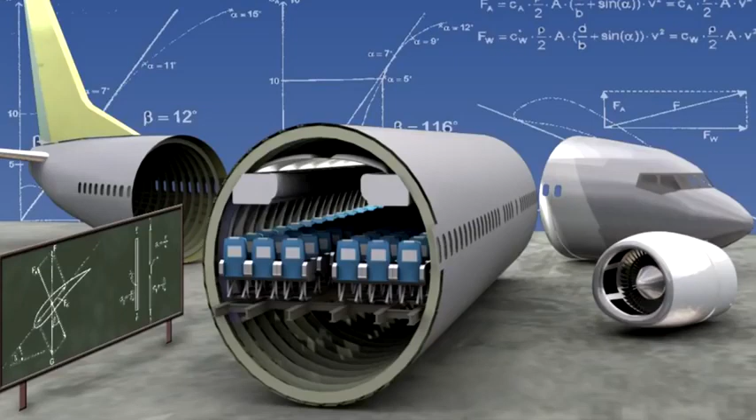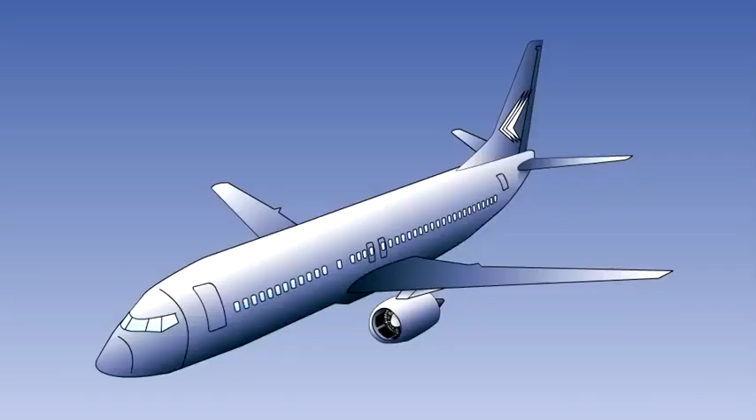There are three main types of fuselage construction in use. First, there is the truss or framework type, which is generally used for light, non-pressurized aircraft. Then there is monocoque, which is only rarely used. And finally, semi-monocoque, which is in use on most other types of aircraft. The last two types of structure are more generally referred to as stressed skin.

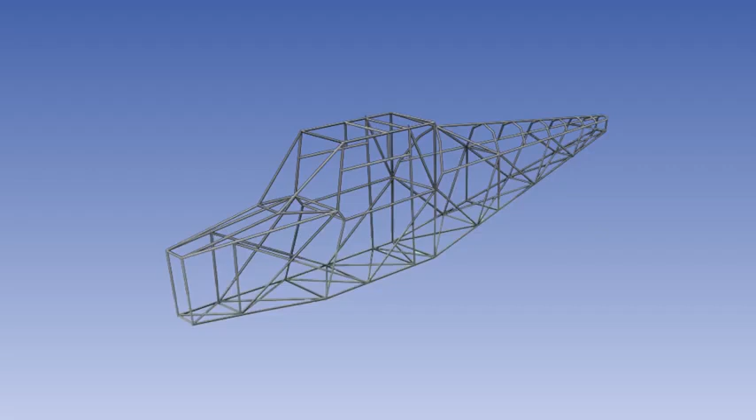The framework or truss consists of light gauge steel tubes welded together to form a space frame of triangular shape to give the most rigid of geometric forms. Each tube carries a specific load, the magnitude of which depends on whether the aircraft is airborne or on the ground. It is a strong, easily constructed, and relatively trouble-free basic structure. The framework is covered by a lightweight aluminium alloy or fabric skin to give an enclosed, aerodynamically efficient load-carrying compartment.

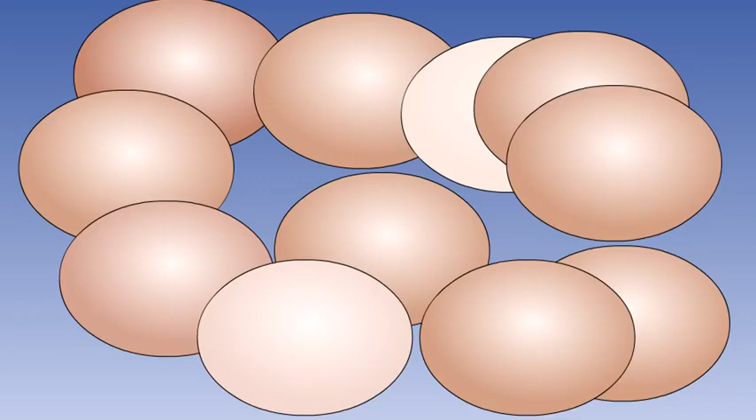Monocoque is a French word meaning a single shell. In a monocoque structure, all the loads are taken by the stressed skin, with just light internal frames or formers to give the required shape.

Sandwich construction, which is a honeycomb core with a skin of aluminium alloy or composite material such as glass reinforced plastic or carbon fiber reinforced plastic, can be used to provide rigidity and strength. However, even slight damage to the skin can seriously weaken the structure.

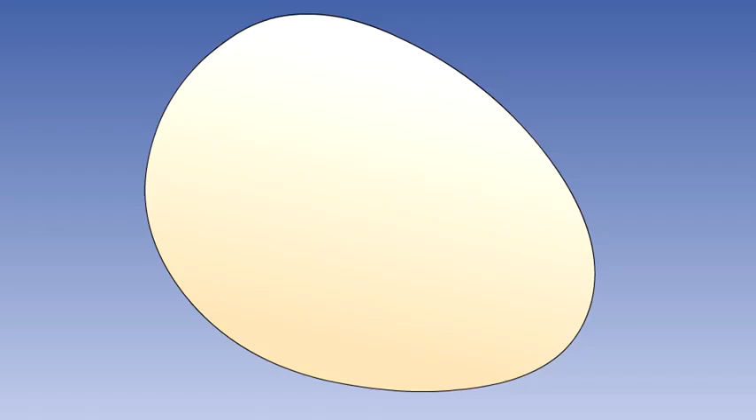To be a true monocoque, the structure would have no apertures in it at all. But for practical purposes, they have to be provided for access and maintenance. The apertures need to be reinforced so that the integrity of the structure is maintained. Once the aircraft doors are closed and all the hatches and access panels are fitted, the fuselage is, to all intents and purposes, a monocoque structure.

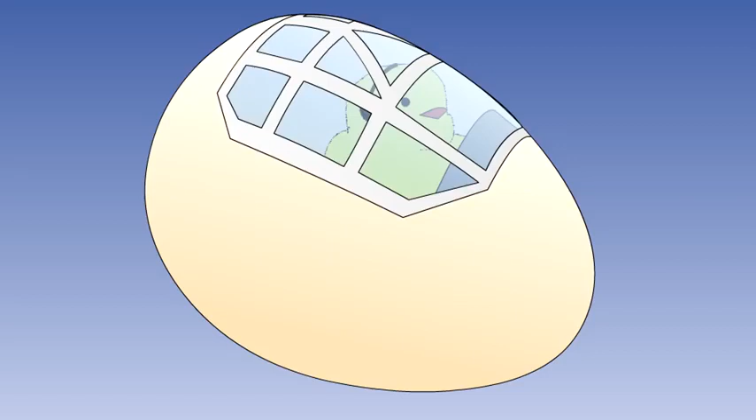One of the few examples of monocoque fuselage constructions is the Beech Starship.

As aircraft became larger and the air loads greater, the pure monocoque structure was found not to be strong enough. Additional structural members, known as stringers or stiffeners, and longerons are added to run lengthwise along the fuselage, joining the frames together. The light alloy skin is then attached to the frames and stringers by riveting or adhesive bonding.

Stringers stiffen the skin and assist the sheet materials to carry loads along their length. On pressurized aircraft, they take some of the strain caused by the pressurization and convert it into tensile stress. Longerons are more substantial than stringers and are fitted where extra strength is needed, such as for the seat rails in passenger aircraft.

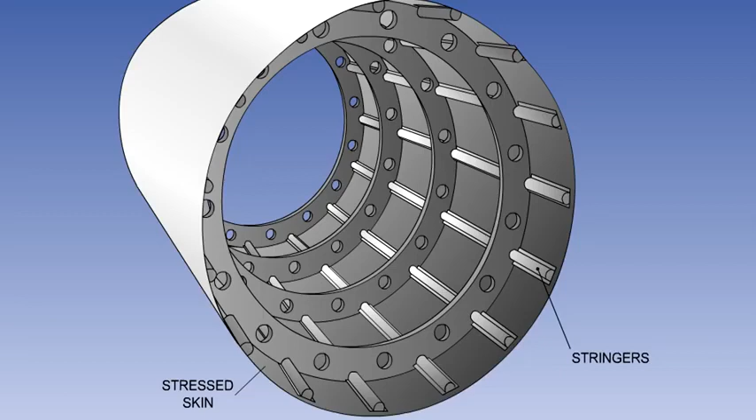When cutouts are made to stress skin structures, for example to provide access panels, doors or windows, or when repairs are required to damaged areas, reinforcement in the form of doublers or backing plates is required around the cutout. If the skin is machined from solid metal, then that part around the cutouts is left thicker than the rest to provide the required reinforcement.

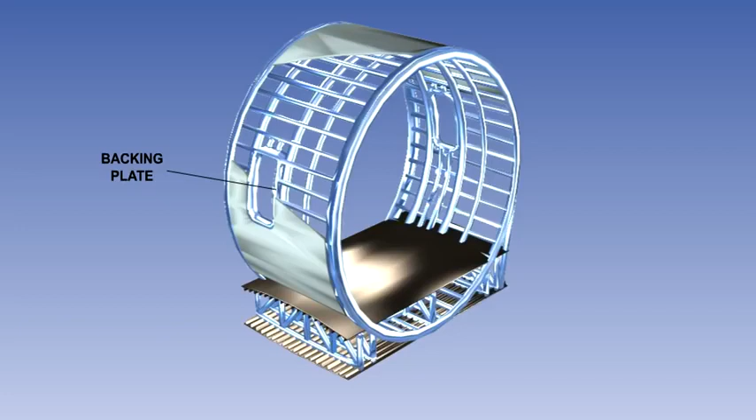The flight deck windows fitted to pressurized aircraft must withstand both the loads of pressurization and, because birds also use the sky and are not under air traffic control, they must bear the impact loads from possible bird strikes.

To do this, they are constructed from toughened glass panels, attached to each side of a clear vinyl interlayer. Windscreens are surrounded with a rubber seal and attached to the frame by bolts passing through the extended edge of the vinyl interlayer.

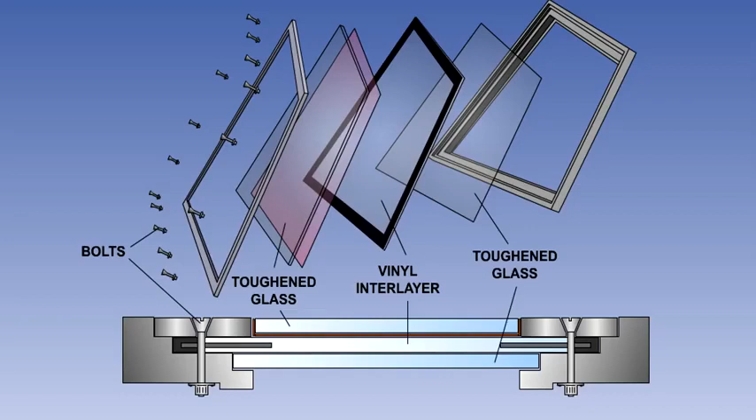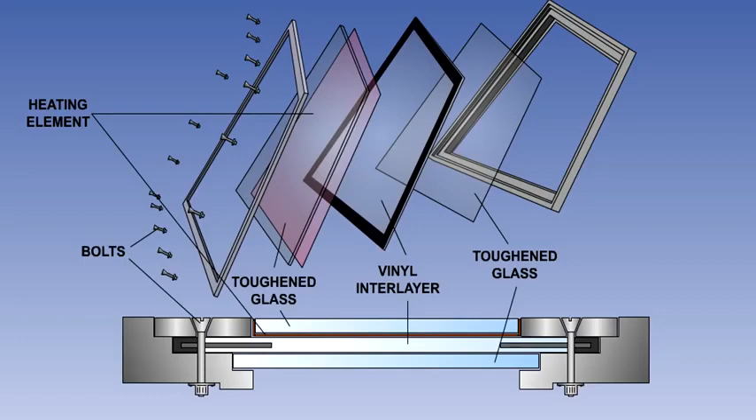An electrically conductive coating applied to the inside of the outer glass panel is used to heat the window. This prevents ice from forming and maintains the window's flexibility, making it more able to withstand bird strikes. The shock loading of a bird strike impact is absorbed by the ability of the vinyl interlayer to stretch and deform should the impact be sufficient to shatter the outer glass.

The aircraft must be capable of continued safe flight and landing after impact with a 4-pound or 1.8-kilogram bird when the velocity of the aircraft is equal to its design cruise speed, VC, at sea level, or 0.85 VC at 8,000 feet, whichever is the most critical. In other words, the windscreen must be able to withstand this impact without penetration.

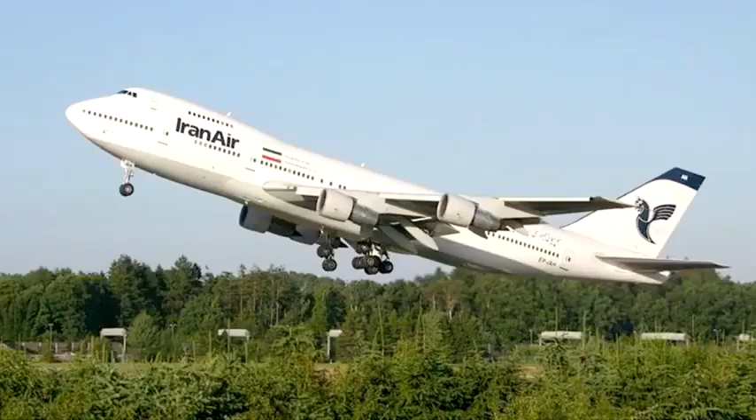The vertical and horizontal angles of the windscreen are specified so that each pilot has a sufficiently extensive, clear and undistorted view to be able to safely perform any maneuvers within the operating range of the aircraft.

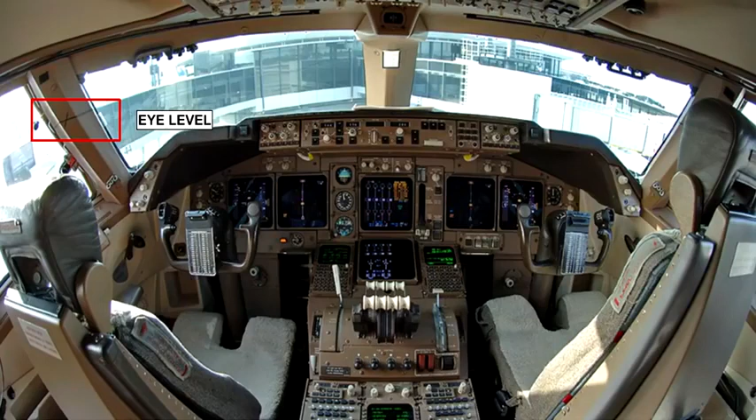It is important that the pilot has his seat in the correct position to get a good view forwards and downwards out over the window, over the coaming and nose of the aircraft, without restricting his overall view. To help with this, reference eye points are often painted on the flight deck windscreen frame.

On some aircraft, an opening window to the side of the windscreen, known as a direct vision or DV window, is provided to enable the pilot to have sufficient visibility to land the aircraft safely should the windscreen become obscured. These windows are also sometimes used as emergency exits.

Passenger cabin windows are designed to be fail-safe and normally have two panes of acrylic plastic mounted in an airtight rubber seal fitted into a metal window frame. The inner and outer panes are each individually capable of taking the full cabin pressurization load, so if one pane fails, the other will prevent loss of cabin pressure.

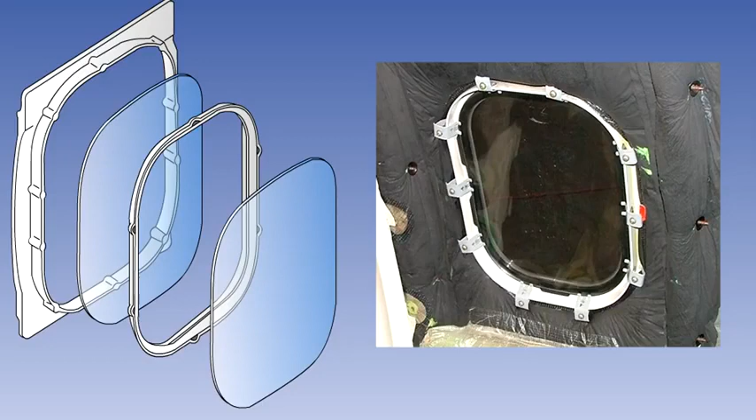The wings support the weight of the aircraft in the air, and so must have sufficient strength and stiffness to be able to do this. Their strength and stiffness is determined by the thickness of the wing, with the thickness and type of construction used being dependent on the speed and weight requirements of the aircraft.

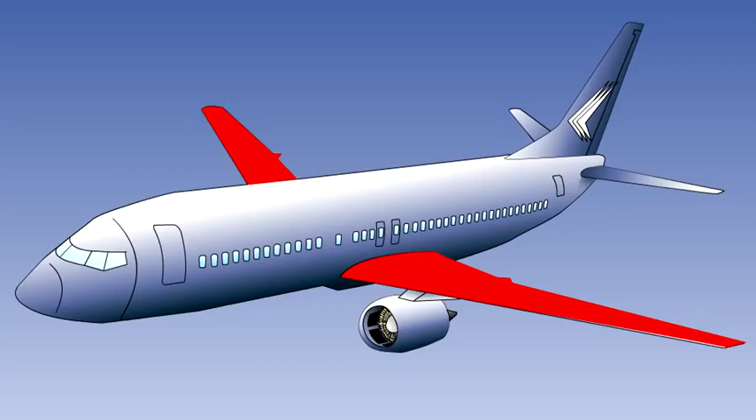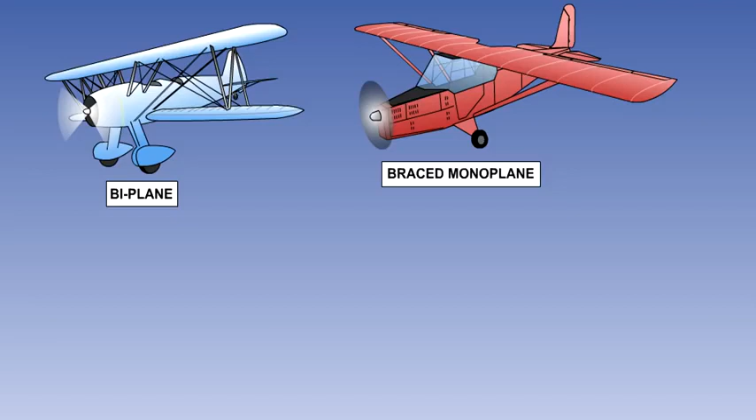The types of construction are biplane, braced monoplane, and cantilever monoplane.

Very few biplanes fly at more than 200 knots in level flight, so the air loads are low, which means that a truss-type design, covered in fabric, is satisfactory. The wing spars, interplane struts, and bracing wires form a lattice girder of great rigidity, which is highly resistant to bending and twisting. Unfortunately, this system also generates a relatively large amount of drag, which accounts for the fact that biplanes fly relatively slowly.

In flight, the flying wires hold the wingtips down and support the fuselage. On the ground, tension in the landing wires supports the wings.

In the braced monoplane type of design, the wing is connected by a brace to the fuselage or landing gear. In flight, the brace is subject to tensile loads and acts as a tie. On the ground, it is under compression and acts as a strut. To provide fail-safe protection, the brace is often made from more than one member. The Shorts Skyvan, for instance, has three members per brace. This type of design is mainly used on low-speed aircraft.

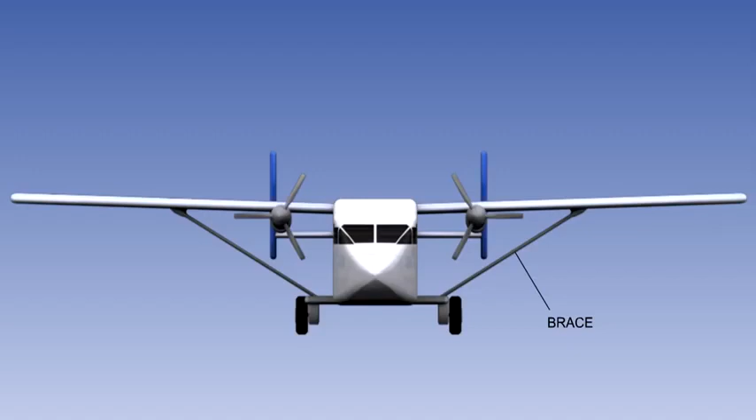Now we will look at cantilever wings, the design used by most modern airliners. The wings have to absorb the stresses due to the lift and drag in flight, and, if of this design, their weight when on the ground.

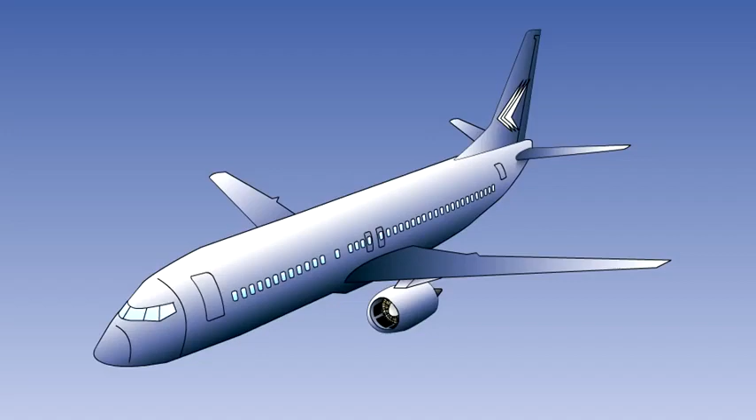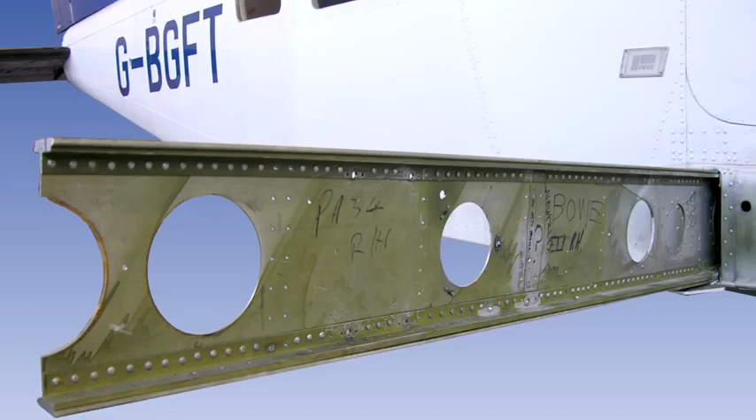This is achieved by building the wing around one or more main load-bearing members known as spars. The wing spars pass from wingtip to wingtip either as single structures or as connected sections. The spar will normally be an I-beam, either manufactured as a single part or made up of two or more parts to give it fail-safe characteristics.

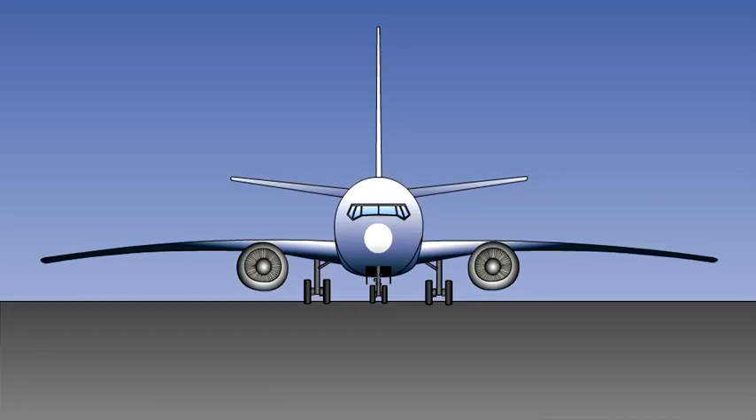These are constructed so that they will absorb the downward bending stresses when on the ground, and the upwards, rearwards and twisting stresses when in flight.

In flight, bending stress relief is provided by mounting engines on the wing and by locating the major fuel tanks in the wing. Fuel usage procedures are designed so that the wing tank fuel is used last. This is of particular importance at high all-up weights, when the outer wing fuel tanks should be full. As fuel is used, the weight of the aircraft decreases, which reduces lift required and therefore the wing bending moment.

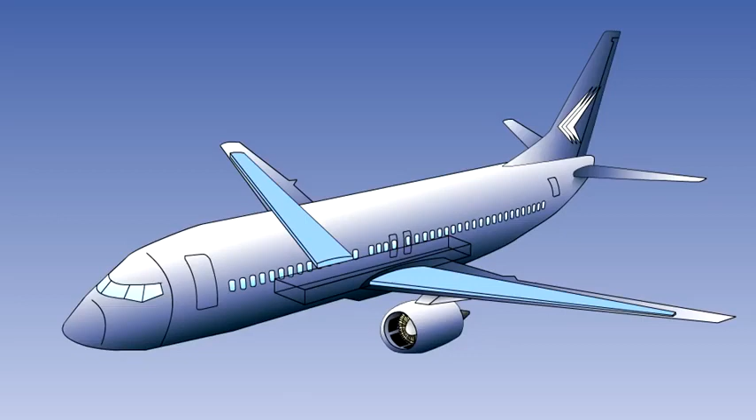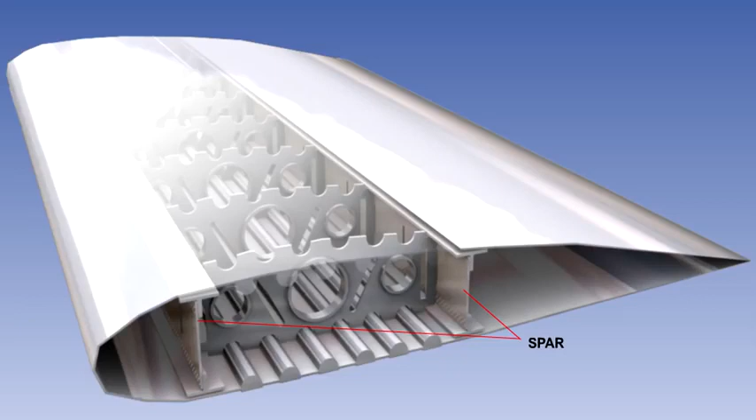The wing may be of a single spar, twin or multi-spar construction. A conventional structure would consist of front and rear spars, stringers, and ribs, with the metal skin attached to them to form a torsion box. The torsion box functions as a beam, but is considerably lighter than a solid beam of the same size, without losing much strength.

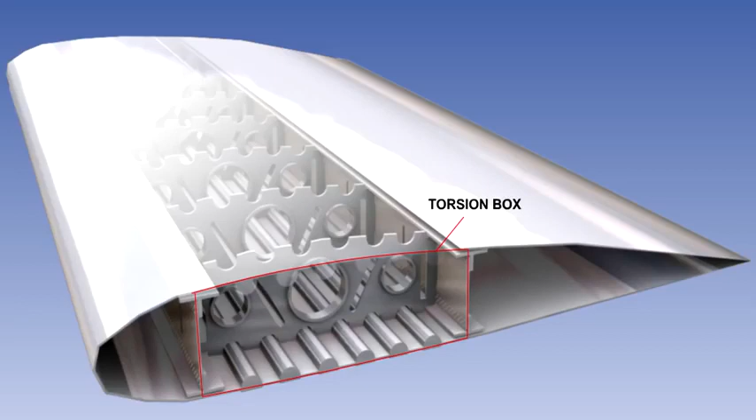The stressed skin takes the loads due to the differences in air pressure and the mass and inertia of the fuel in the wing tanks. It generates direct stresses in a span-wise direction as a response to bending moments, and it also reacts against twisting forces.

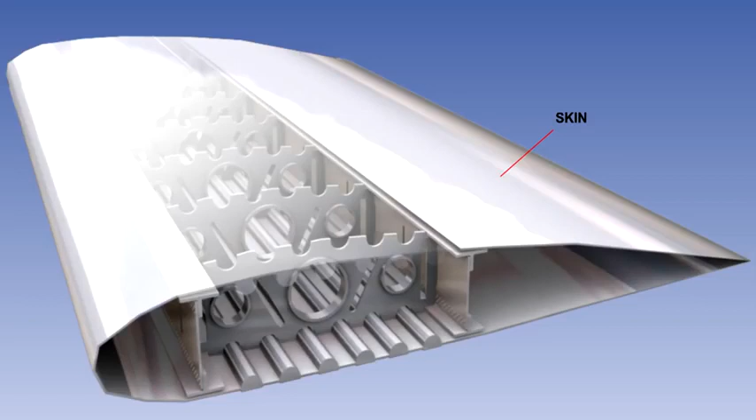Stringers are span-wise members which give the wing rigidity by stiffening the skin in compression. In most modern aircraft, they are formed by machining integral ridges into the skin.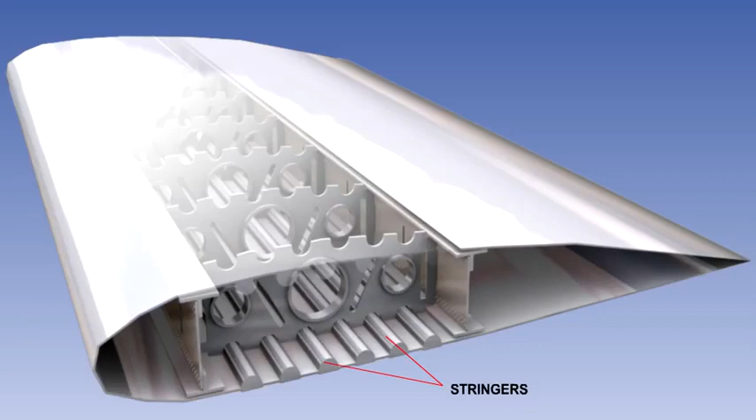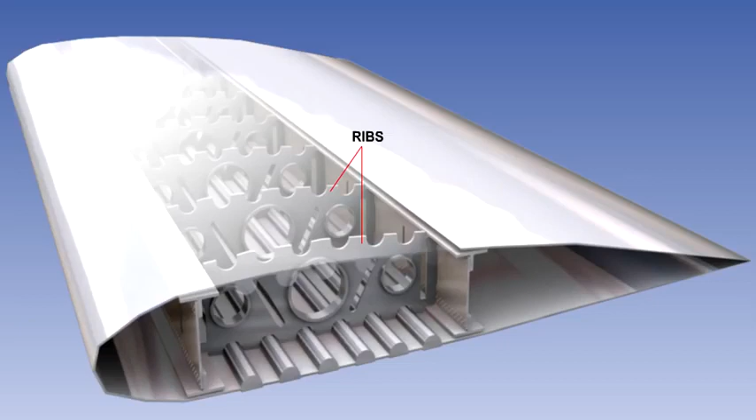Ribs maintain the aerofoil shape of the wing, support the spars, stringers, and skin against buckling, and pass concentrated loads from the engines, landing gear, and control surfaces into the skin and spars. Ribs often have lightening holes cut into them. As well as reducing the weight of the structure, these holes are usually flanged to help stiffen the rib.

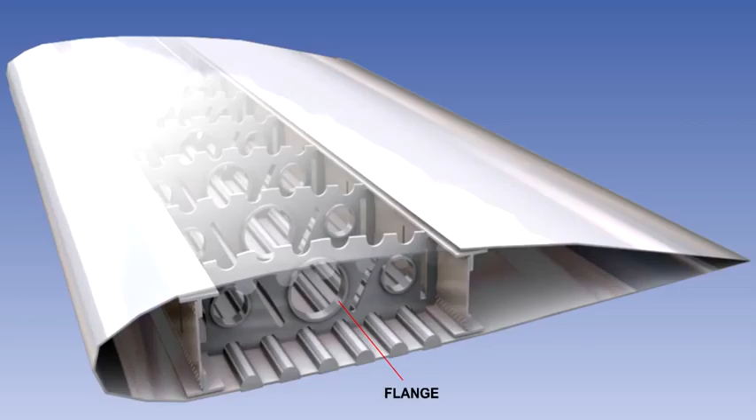The major structural components of the wing are generally manufactured from aluminium alloys, with composite material such as glass-reinforced plastic or carbon-reinforced plastic and honeycomb structures being used for more lightly loaded structures. Carbon-reinforced plastics are gaining wider acceptance for the manufacture of major structural components, such as the fin and horizontal stabilizer.

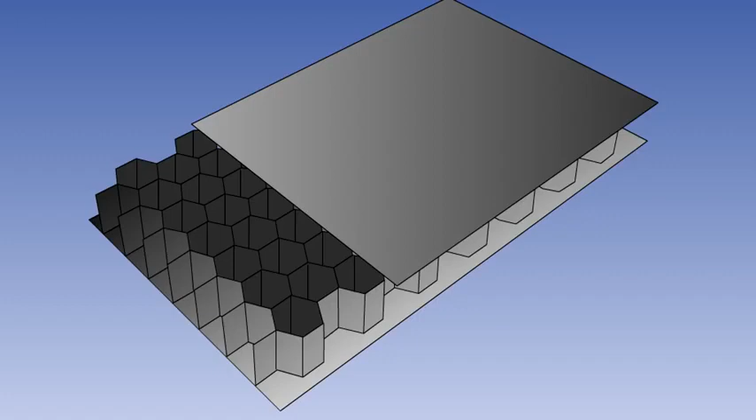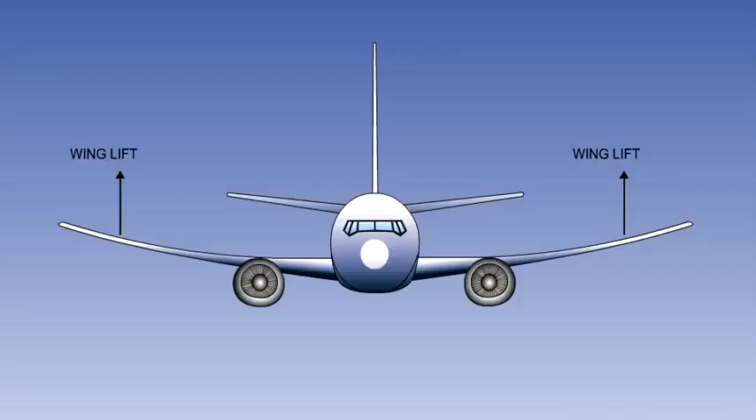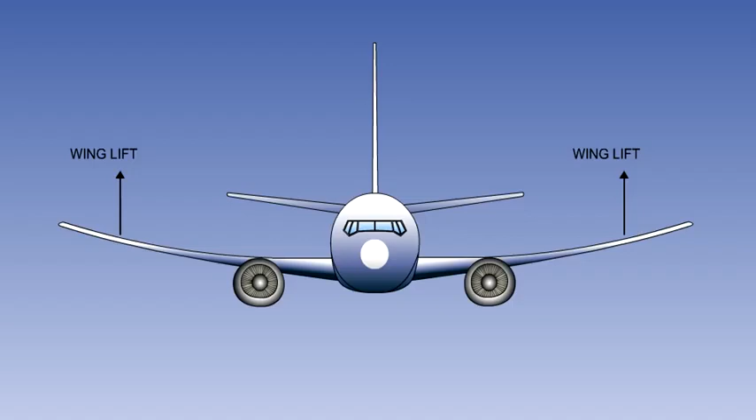There are a number of aircraft mass limitations you must become familiar with. The maximum zero fuel mass of an aeroplane is defined as the maximum permissible mass of an aeroplane with no usable fuel. This limit is set by the maximum bending load that the wing root is able to support. The maximum zero fuel mass sets the maximum load that can be carried in the fuselage. Fuel added to the wing will not increase the wing bending load - in fact, it will reduce it.

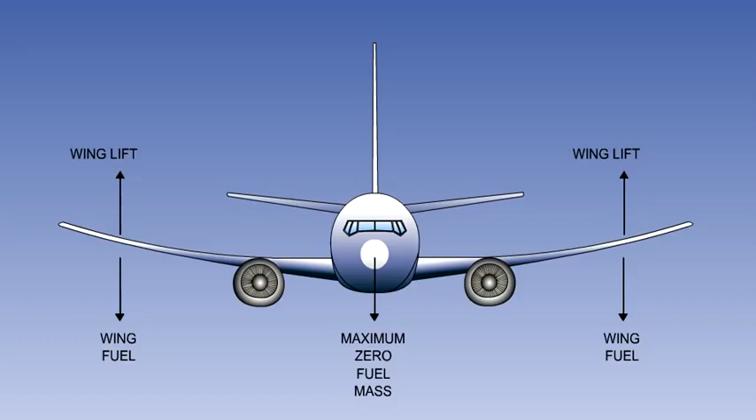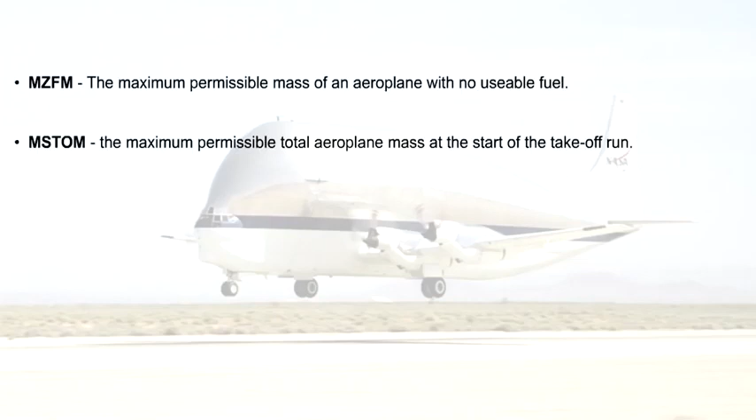Maximum structural takeoff mass is the maximum permissible total aeroplane mass at the start of the takeoff run. Maximum structural taxi mass is the maximum mass of the aeroplane at the commencement of taxi, sometimes also referred to as the maximum ramp mass. Maximum structural landing mass is the maximum permissible total aeroplane mass on landing in normal circumstances.

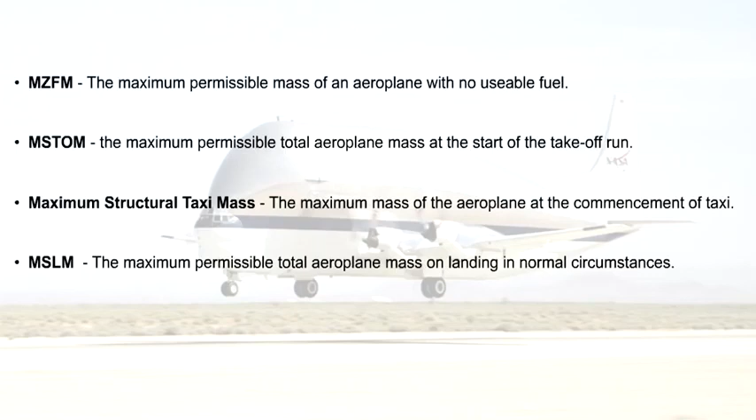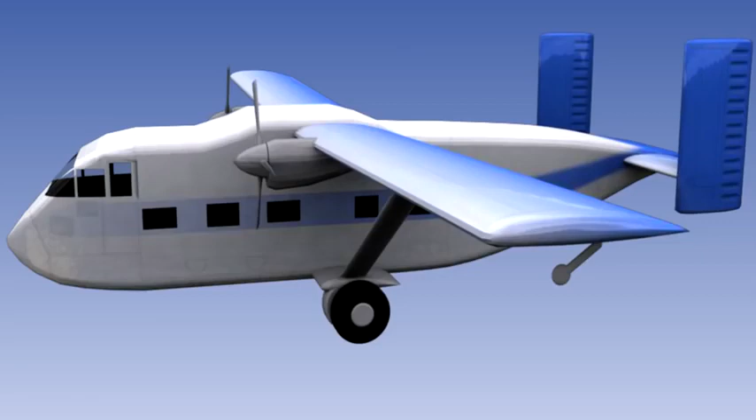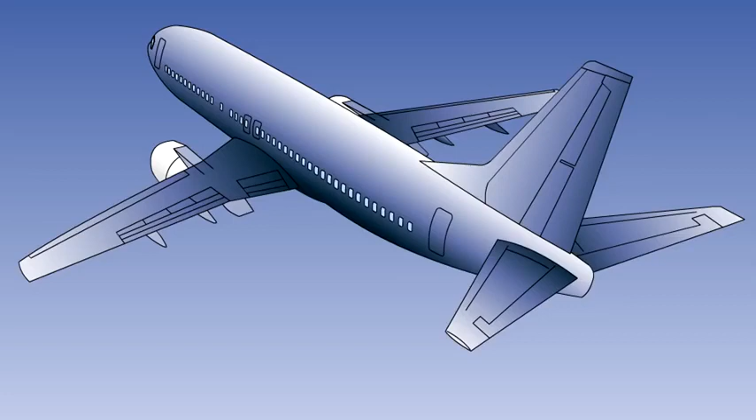The horizontal surfaces, known as the tailplane or horizontal stabilizer, provide longitudinal stability by generating upwards or downwards forces as required. Longitudinal control is provided by either the elevators or the moving tailplane, depending on design. For instance, the Boeing 747 uses elevators for control and the tailplane for pitch trim, whilst on the TriStar the roles are reversed, the tailplane being used for control and the elevators for trimming.

The vertical surfaces, the vertical stabilizer or fin, generate sideways forces as required to provide stability about the normal axis. Directional control is provided by the rudder. The operation of these flying controls is fully covered in the Flight Controls series of lessons.

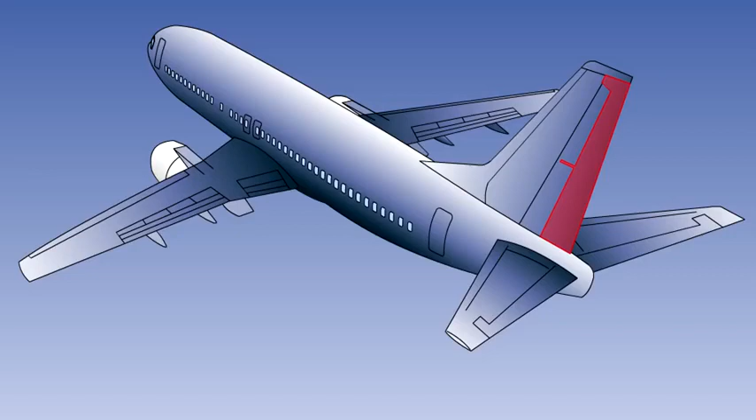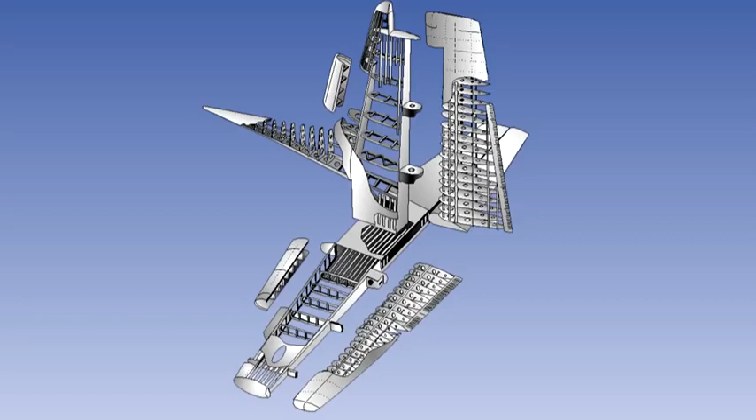Both the tailplane and the fin are subject to similar, but smaller, bending and torsional stresses as the wing. Structurally, the tail unit components are generally smaller versions of the wings, in that they use spars, ribs, stringers, and skin in their construction. On some aircraft, they may also contain sealed compartments for fuel storage. They are also constructed of the same basic materials as the wings. Usually, aluminium alloys are used, with composites filled with honeycomb structures, or high-density expanding foam, sometimes being used for control surfaces to provide greater stiffness at low weight.

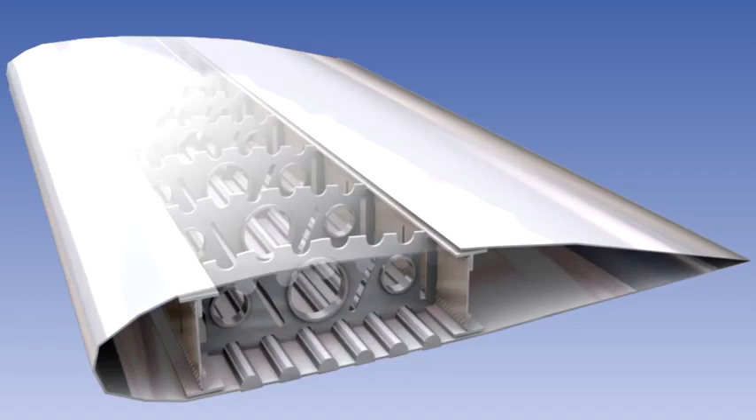Aerodynamic flutter is the rapid and uncontrolled oscillation of a flight control, or the surface to which it's attached, which occurs as a result of an unbalanced surface. A full aerodynamic explanation can be found in the Principles of Flight series of lessons. Flutter is caused by the interaction of aerodynamic torsion and bending forces, inertial forces, and the elastic properties of the surface or structure. It can lead to catastrophic failure of the structure.

Flutter must not occur within the normal flight operating envelope of the aircraft. Flutter can be prevented by mass balancing control surfaces to alter the moment of inertia of the surface and therefore the period of vibration. This can be achieved by positioning balance weights forward of the control surface hinge line to move the control surface center of gravity closer to the hinge line. Flutter of the wings can be prevented by using the engines as mass balance, by mounting them on pylons forward of the wing leading edge.

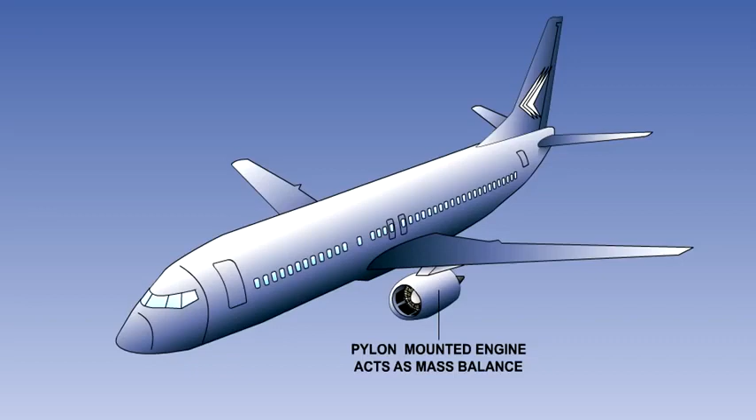The fact that an aircraft is poorly maintained, particularly in respect to excessive control surface backlash or flexibility, may mean that flutter will occur at speeds below the limit airspeed.

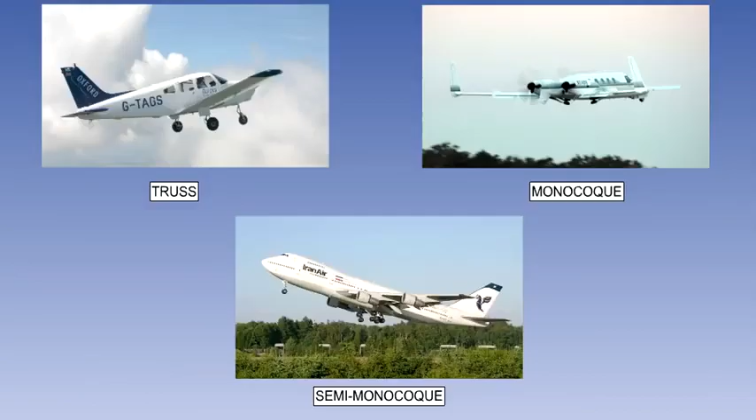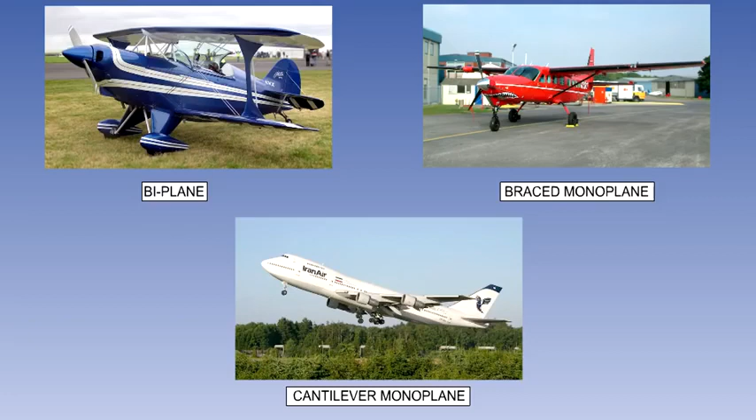This is the end of the lesson. You should now understand the differences between truss, monocoque, and semi-monocoque fuselage construction, and the differences between biplane, braced monoplane, and cantilever monoplane wing constructions.

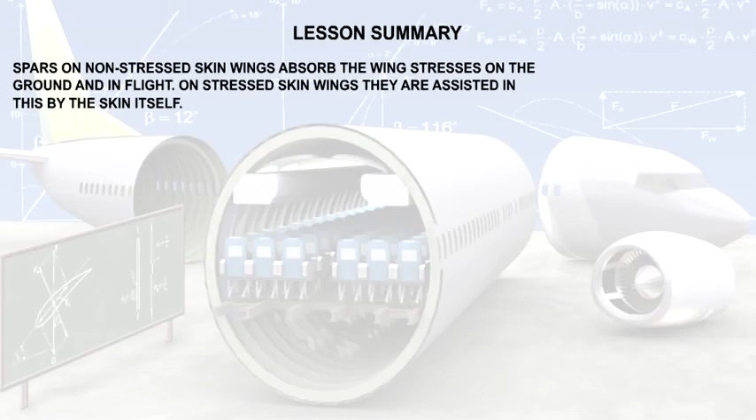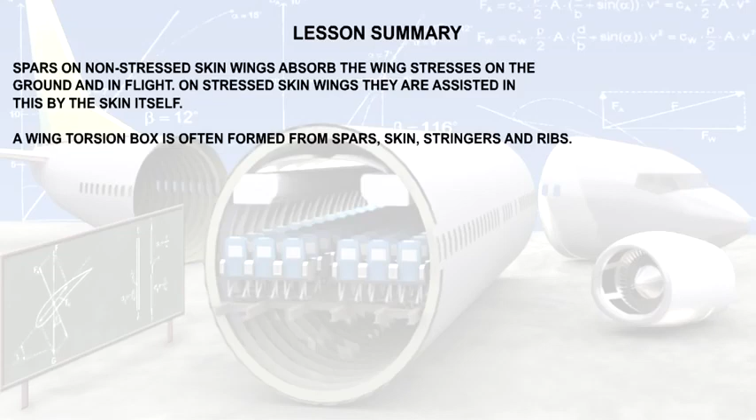You should also note the following key points from this lesson. Spars on non-stressed skin wings absorb the downward bending stresses when on the ground and the upwards, rearwards, and twisting stresses when in flight. On stressed skin wings, they are assisted in this by the skin itself. On larger aircraft, a wing torsion box is often formed from spars, skin, stringers, and ribs. Fuselage stringers stiffen the skin and assist the sheet materials to carry loads along their length. On pressurized aircraft, they take some of the strain caused by the pressurization and convert it into tensile stress.

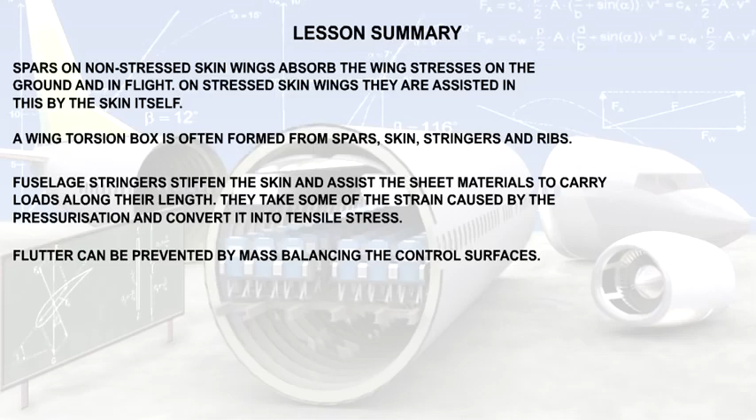Flutter can be prevented by mass balancing control surfaces. Finally, you should know the meaning of the various maximum structural masses to which an aeroplane is limited. Remember that the maximum zero fuel mass of an aircraft limits the bending moment at the wing root, while allowing the maximum load to be carried.